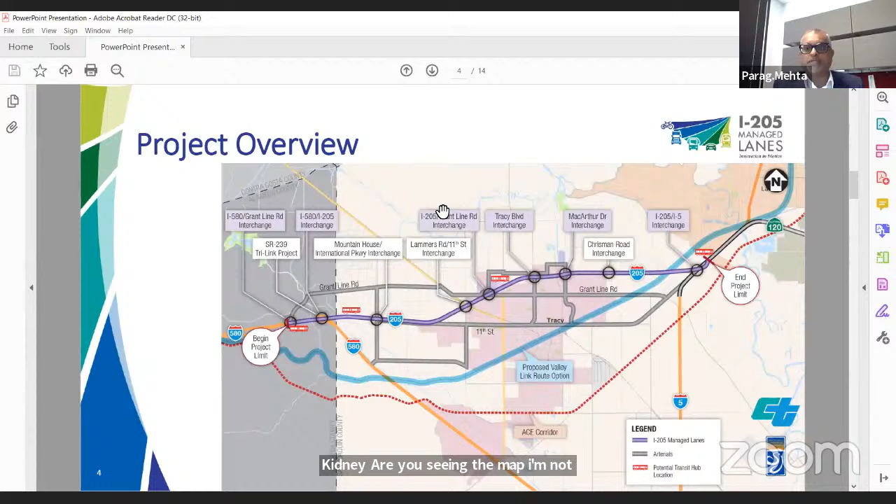Are you seeing the map? I'm not sure if my slides are moving. Right, we're on the project overview now. Okay, all right, sorry, so I was just kind of going through it, where we are and where we're going.

So just to give you an overview, some of you may have seen this before, know the project limits. What I wanted to highlight is our limits are in Alameda County, just west of the 580-205 system interchange, and it runs through 205 through the city of Tracy, just ending east of I-5. So the entire 205 section through the city of Tracy is part of our project.

We understand that there are a number of efforts ongoing in this area: the 239 Tri-Link project with CCTA, the city of Tracy doing Mountain House, Lammers, and Chrisman Road interchange projects, the ACE alignment, and the current CEQA Valley Link alignment. There are a number of parcels being developed. So part of our 205 corridor project in environmental clearance is coordinating with all these projects, making sure the project impacts are coordinated, and understanding how to incorporate those into the 205 managed lane project. Part of our project, we'll be looking at the Grant Line Road interchange in Alameda County, the 580-205 interchange, three interchanges in the city of Tracy, and the I-5-205 system interchange.

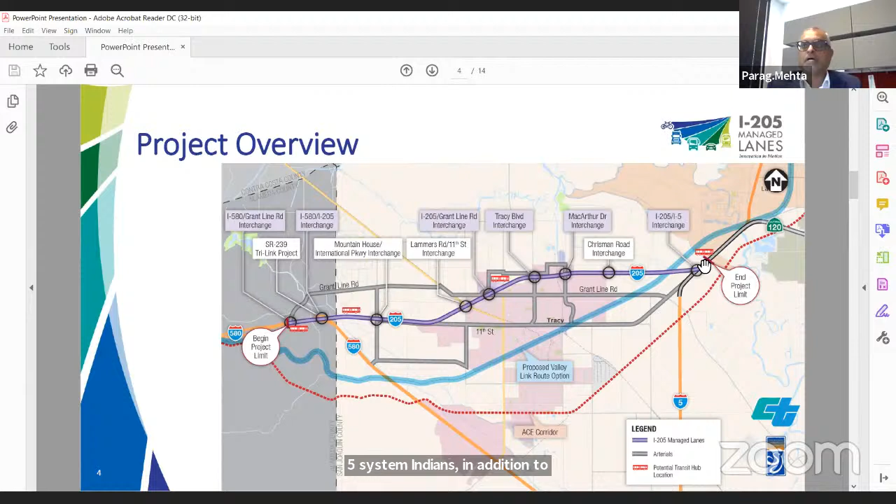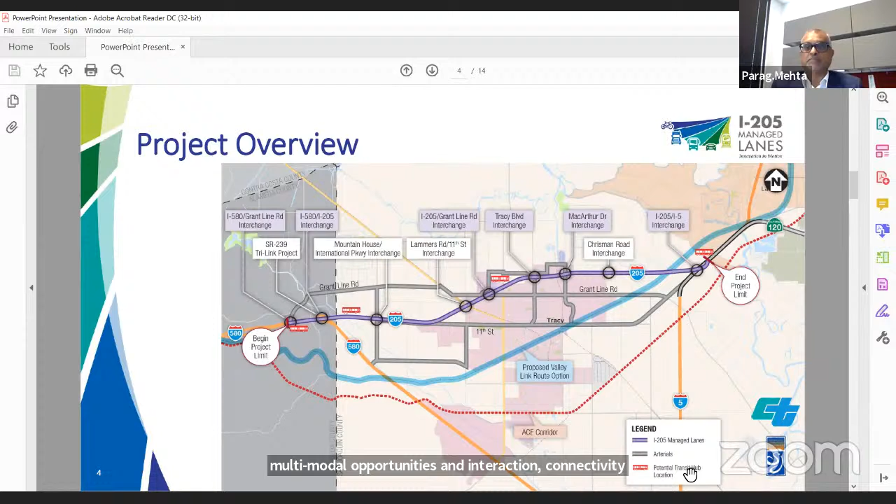In addition to the 205 improvements, we are also looking at potential for transit hubs. These are definitely more enhanced than typical park and ride lots. We're looking at advancing it to provide for multimodal opportunities and connectivity, maybe even EV parking and everything that goes with it, with the project. So that's the overall corridor that you're very familiar with, the area that needs this project.

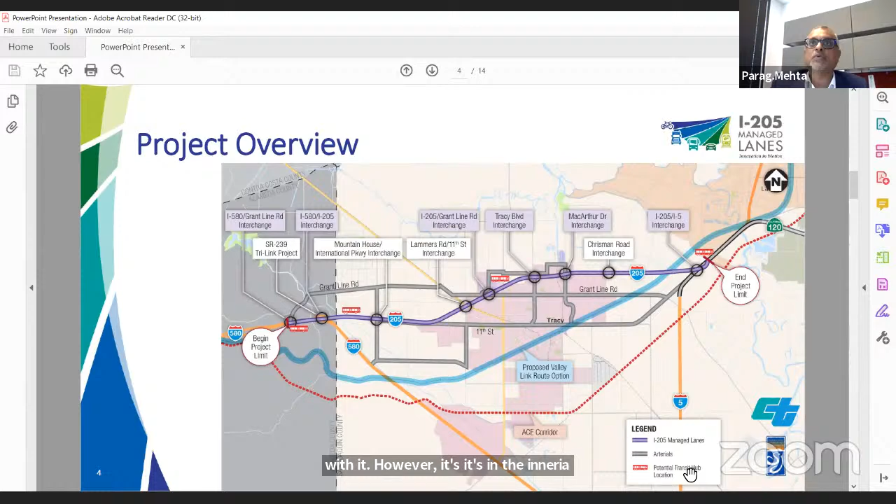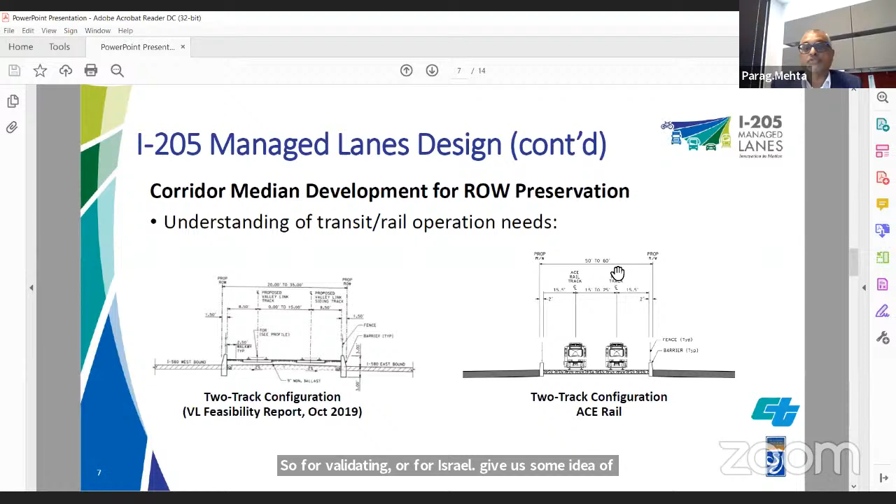What we did is look at understanding the transit and rail operation needs in terms of the typical sections for 2 tracks, say for Valley Link or for ACE Rail. This gives us some idea of the width that would be needed for two-track operations in the median.

We also are looking at a dedicated bus service. Multimodal options is basically our focus - we don't want to preclude any future opportunities. As I mentioned, we are in a very early phase of developing a footprint and doing the environmental clearance, and we want to make sure we are accommodating all different possibilities which can help promote multimodal options in this region. So the idea is to preserve the median of 205 for this mass transit option.

And 205 is a Caltrans right-of-way, so we understand that this will all be subject to Caltrans approval. Again, it's a preliminary engineering planning stage, going through the environmental process. We'll go through iteration, and we're just very early, seeking input from all different stakeholders and operators.

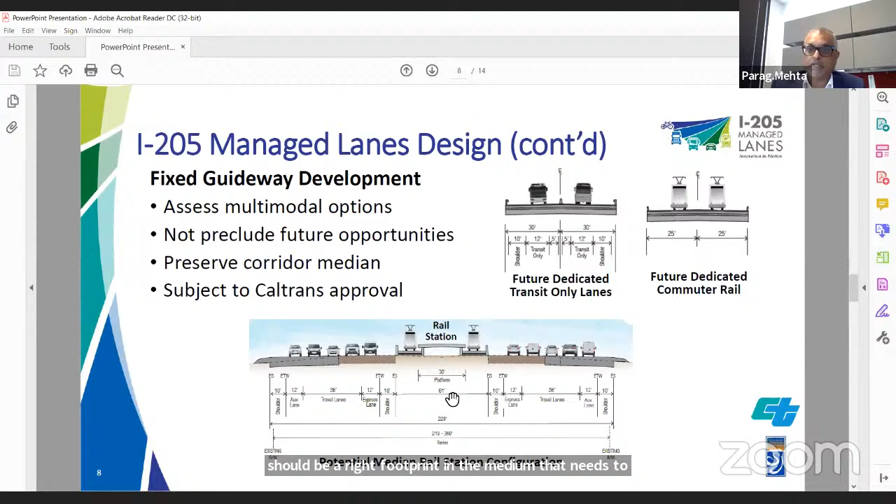One idea we also had was providing the station and trying to figure out, with all different scenarios, what should be a right footprint in the median that needs to be preserved for a future opportunity in the 205 corridor. So with all that iteration and trade-offs, where we are right now is we have 5 alternatives.

This includes a no-build option, which basically means we don't do anything - part of the EIR process, I'm sure you're familiar with that. And we are looking at high occupancy vehicle lanes, express lanes, something that we have shown here with tolling, the express lanes, and transit-only lane.

With all these different scenarios on the highway, we are looking at what can be done on the median and what right-of-way we should be preserving for a mass transit option. We want to share that median for express lanes infrastructure, and at this point we have a 45-foot unobstructed transit corridor width available. We'll need some coordination and understanding of what can come there, what is viable, what should be preserved. So nothing in the future is precluded at this stage, and we're just developing the footprint.

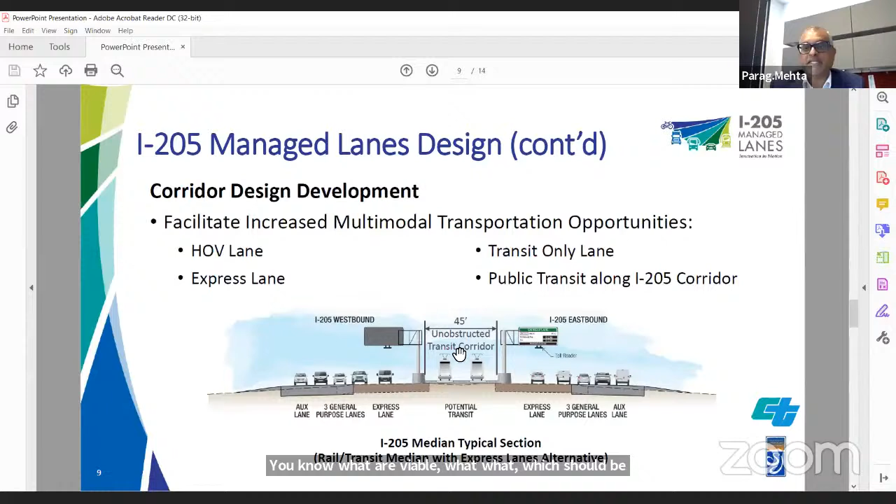Some other considerations that will go into the corridor design are the transit hubs, equally important for the corridor. If we want to promote more multimodal facilities, we need transit hubs that are more inviting and appealing and can promote multimodal use. The three interchanges that are part of our projects in the City of Tracy would be implemented with complete street elements, consistent with the multimodal promotion. The highway operations will need to be looked at with elements of integrated corridor management to improve commuter time, transit time, and goods movement.

So that's the engineering and preliminary engineering side of developing the footprint, working with traffic, working with stakeholders, and developing different improvements.

From the environmental standpoint, which is the phase we are in right now, status-wise we just completed the Notice of Preparation late last year and are working through the general comments received. Overall it was very supportive of the project, with requests for more outreach and traffic analysis, which would be part of our PAED scope. There was also a lot of trend towards a transit-oriented alternative.

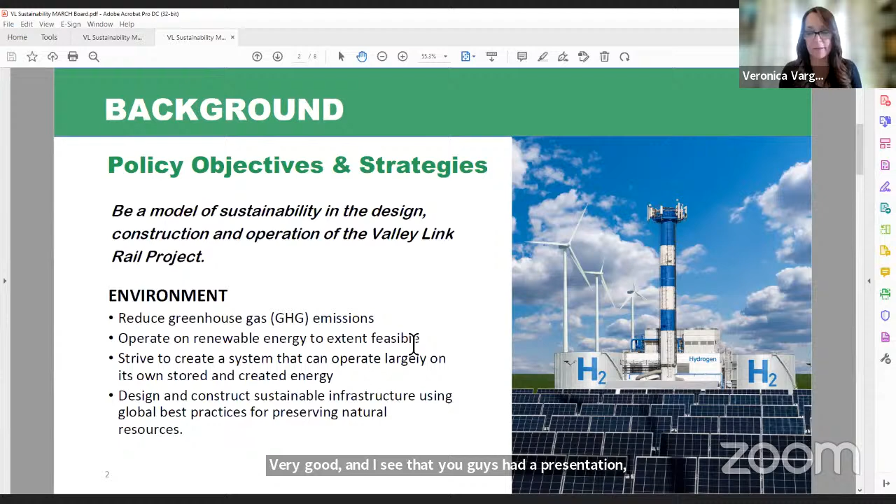Very good. And I see that you guys had a presentation, and I know that Director Hudson and Woerner had a very engaging discussion on this topic. I don't know if you guys want to go over the presentation. I think the proof of concept of this study is wonderful. I know it was a robust discussion during their subcommittee, and you guys are taking this and working hard to just get the preliminary funding. So with that, I don't know if one of you gentlemen would like to take the presentation and go through the slides.

So I don't know, are you asking us to go through the slides, or is there somebody who presented the slides that would like to go through that? Director Woerner, I can do the introductory slides if you'd like, and then with the ad hoc report, if you'd like to give a recap of the key points from the meeting. They're identified in 2 slides. Sure, that would be fine.

Okay, just as background, I always like to start with our key policy objective to be a model of sustainability in the design, construction, and operation of the Valley Link Rail Project. And of course, our strategies identified in our adopted sustainability policy are what we are pursuing in this effort now.

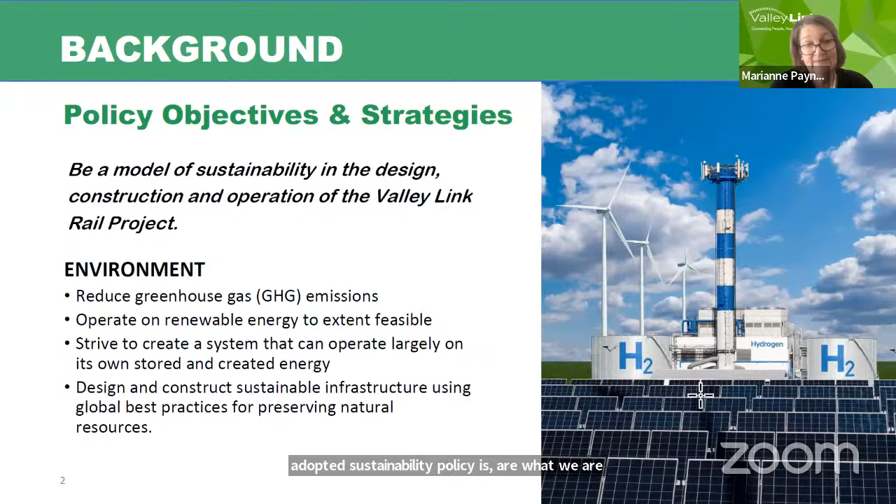Next slide. Just as a reminder, per our adopted 2022 work program, we have been undertaking a series of strategic discussions: in February on vehicle technology, March is our month to examine potential energy strategy and kick off our proof of concept study for a potential hydrogen production plant. Next, in April, we'll actually be back to look at some preliminary findings of the proof of concept for the hydrogen production plant, and also examine some global best practices for sustainable design. March and April, we're looking at a possible town hall meeting. And then in May, we'll be asking the board to consider some recommendations on some of these topics we've been reviewing.

Next slide, Candace. So for today's agenda, we'll start with a report and then a discussion that will be led by Brendan Schaffer from Zen, our project team. And then after our discussion, we'll look at next steps. So next slide.

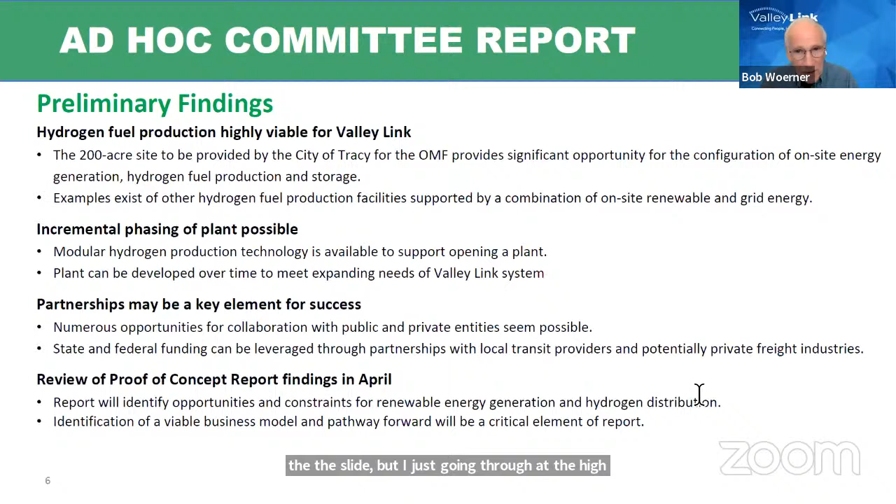Sure, I think everybody can read the slide, but going through it at a high level, the exciting thing is that the site is available to produce the energy needed to run the trains. The question is what fraction of the energy needed to run the trains can be produced on site. What more might we have to get, or on the flip side, is there excess production that could actually be sold and utilized by others?

So that's part of sizing the site versus the production technology, and then you think about all the different efficiencies in the technology. You have to do a lot of technical analysis to decide what fraction of the total energy needs the site itself can produce, and at what cost, and does it make sense. But in principle, what we're looking at is something that would be really nicely zero emissions, with all the energy needed to run this system produced on site. That's to be calculated and thought through, and then you can look at other examples around to see whether the calculations make sense.

The next bullet is that you could do this in phases. You don't have to do it all at once. And as was also pointed out, partnerships are necessary. There are other entities producing energy in the vicinity, and to what extent can we partner with them? And then, of course, what funding can you get based on the kind of concepts that we have?

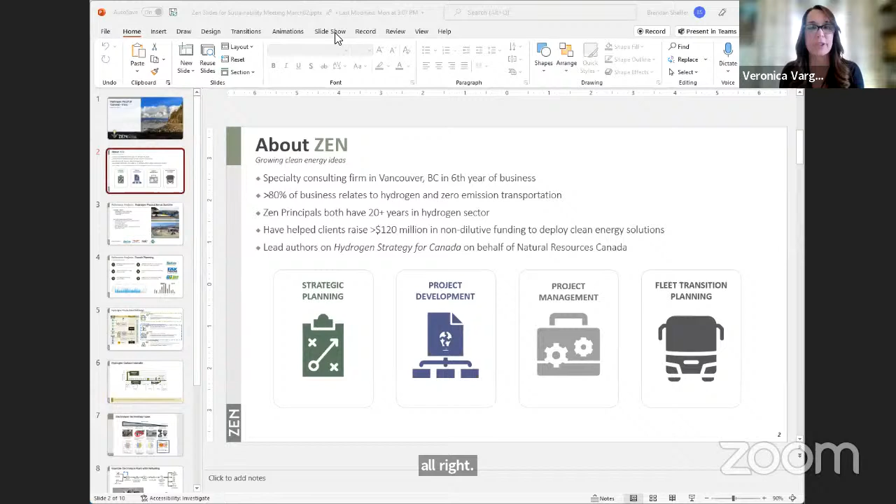Just a quick summary about who Zen Clean Energy Solutions is. We're a specialty consulting firm in our 6th year of business. It was started by Sabina Russell and Jeff Grant, who were longtime employees at Ballard Power Systems, one of the major proton exchange membrane fuel cell manufacturers in the world. They started this consulting firm to look at other factors outside just the fuel cell stack itself.

There's a lot of infrastructure upstream to produce the hydrogen that goes into the fuel cell stack, so they started this consulting firm to work on those other aspects. One of the big things the firm has accomplished is developing the hydrogen strategy for Canada. There are four areas Zen focuses on: strategic planning, project development, carrying that through to project management, and fleet transition planning. Historically this has been a lot with public transit fleets, but it's been expanding into other heavy duty fleets as regulation in California has started to target those fleets.

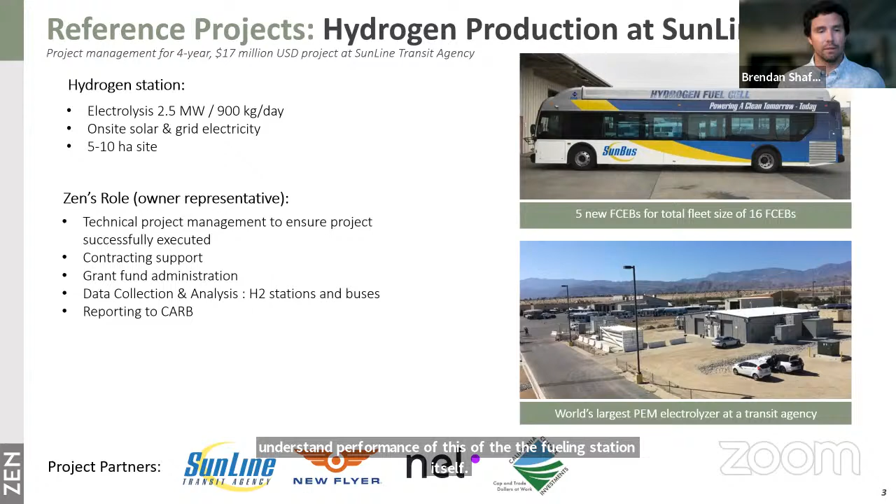The other reference projects we wanted to point out were the transit planning we've done with various transit agencies across the state. With the ICT regulation, the Innovative Clean Transit Regulation, all transit agencies in the state needed to prepare a transition plan to zero emission buses. We participated with several different transit agencies across the state in developing their transition plans.

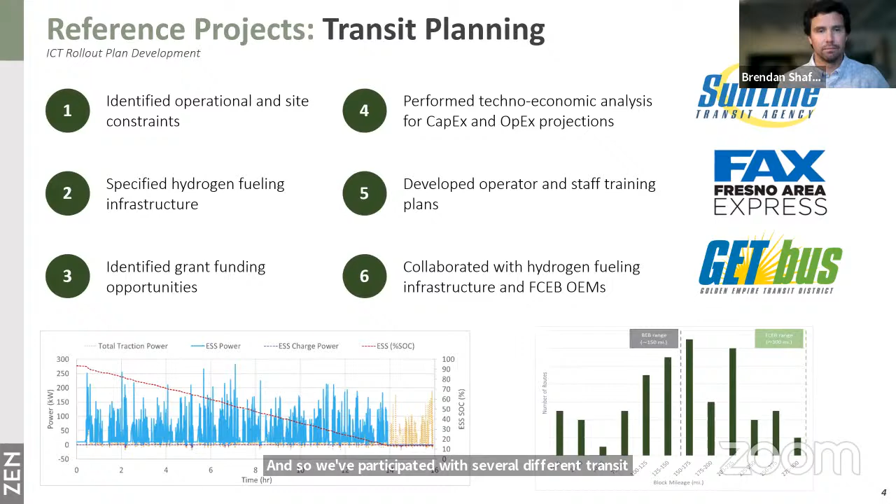Moving on to the topic at hand, which is how we're going to go about working on this proof of concept for this hydrogen production facility. The first thing we thought we would walk through is the different hydrogen production pathways.

I won't spend too much time on this, but the general idea is for this project we're going to focus on green hydrogen, which is electrolytic hydrogen. That means it's coming from an electrolysis process where you're putting in electricity and water to produce hydrogen and oxygen, and this electricity will be renewable electricity, thereby making it green.

As board member Woerner was mentioning, there's quite a bit of land available at the Tracy OMF site, and there's a lot of opportunity for generating a lot of that renewable electricity right there on site.

The other term I want to point out is blue hydrogen, which comes from natural gas with carbon capture on the back end. We're not considering that for this proof of concept, although there might be opportunities with biomass in the vicinity, and there's also the opportunity of wind. All of the hydrogen produced would be very low carbon, if not zero carbon intensity hydrogen.

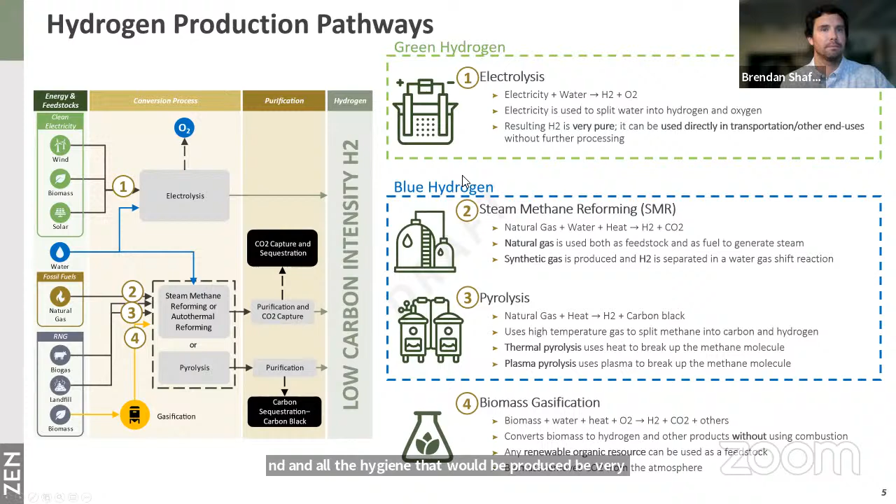So just to quickly run through the different pathways: if the electrolysis is driven primarily from the grid, you're going to have a fairly high carbon intensity. Obviously as the grid gets cleaner, that's going to decrease. But the goal here is really to use on-site electricity and power it 100% with renewable electricity, so you would be basically at zero - not basically, you would be.

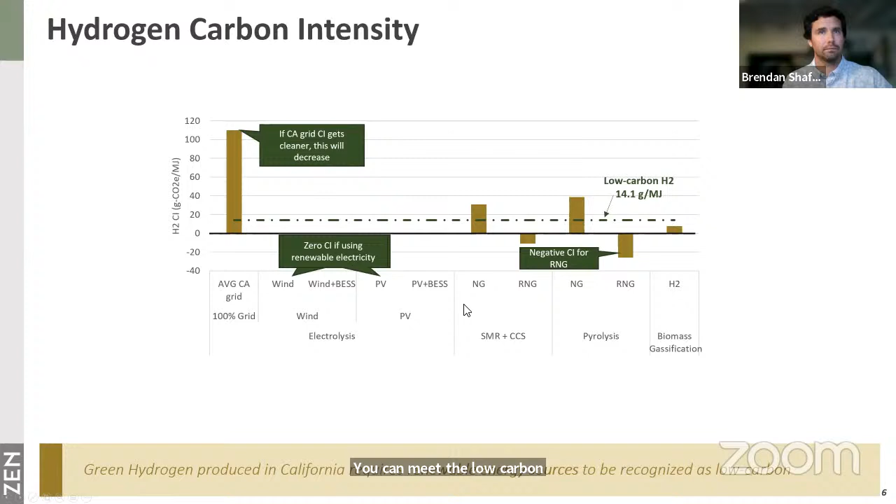This slide just quickly reviews the different electrolysis technologies. It organizes them based on their bankability or commercialized level. So alkaline is a very commercialized electrolysis solution. The issue is that it really needs to be done at industrial scale - it's not very modular, and it needs to operate at steady state for the most part.

Proton exchange membrane is more modular and can have better on-off performance, so it would fit better with a variable renewable energy electricity input, such as wind or solar. This would be the technology we're looking at for this project. There are a couple other more advanced technologies in the works, and solid oxide electrolysis is the technology that Bloom Energy is working on.

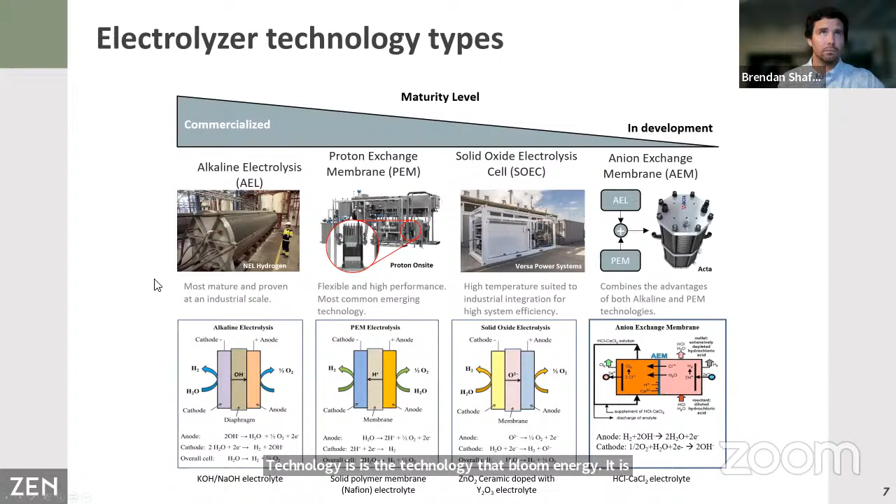On this slide, we're showing the supply chain for green hydrogen. You start with renewable electricity, either from solar or wind. Put the water in, get some hydrogen out. It's going to need to be compressed, and it could also be liquefied depending on your distribution - how you're going to distribute it. You're probably going to have some storage, and then you need to get it to wherever you're going to dispense it into the different vehicles.

On the bottom of the slide, we're showing some layout of equipment, just to give a sense of what it looks like - this would be for a containerized solution. Inside this container would be the electrolyzer, and inside this container would be balance of plant and compression. Then there's some high pressure ground storage, as well as trailers that could be pulled in here. These are some examples from proton exchange membrane electrolyzer manufacturers.

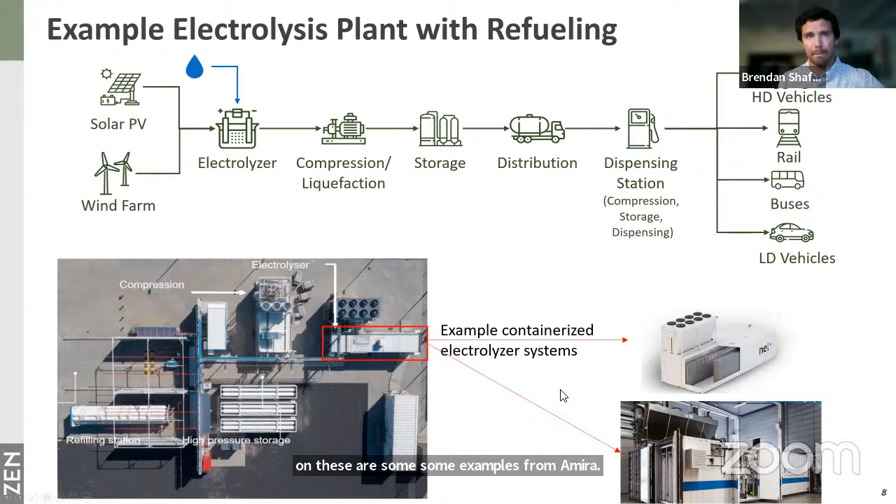And then we thought it'd also be helpful to show what Sunline's system looks like. Sunline's electrolyzer is a NEL proton exchange membrane system, 2.5 megawatts, 900 kilograms per day.

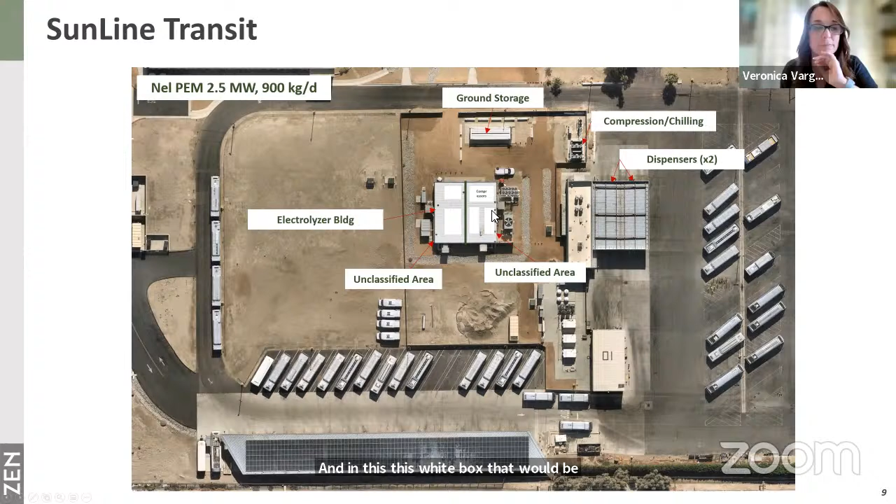It's a building solution, a little different than the containerized solution shown on the previous slide. In this white box here is where the electrolyzer is. There's some gas management over here, and some compressors here. Those compressors boost the pressure of the hydrogen coming out of the electrolyzer, and that goes into the ground storage. Then there's additional compression and chilling that feed to the dispensers.

These are the bus fueling lanes here. And then there's two areas in the building. Hydrogen is on this side, so it's classified—that should read classified. And this is an unclassified area, where the rectifiers are, to take the AC electricity and rectify it into DC, which drives the electrolyzer. There's some additional equipment in the unclassified area.

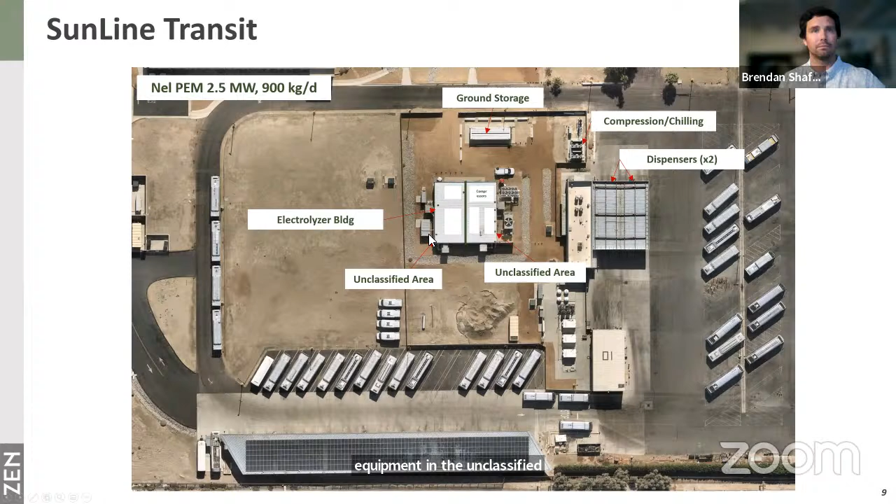And then finally, we put together some quick sensitivity analyses on what the production cost for hydrogen might look like. On the y-axis, we have dollars per kilogram of hydrogen. A kilogram of hydrogen is roughly, nearly equivalent to a gallon of gasoline, just for your understanding. On the x-axis here, we have utilization—how much you're utilizing that electrolyzer asset.

So if you're only putting electricity into it 40% of the time, that would be 40% utilization. What we've overlaid here are different areas of expected utilization depending on the renewable electricity you're using. Photovoltaic solar would be somewhere around the 20 to 30 range. Wind would be anywhere 30 to 40. I think these kind of got shifted a little bit, but you're going to need some battery energy storage if you want to go to a very high utilization.

And then we also have the electricity price effect over here. So this would be for 12 cents per kilowatt hour electricity in, and this would be 2 cents. Each of these lines represents a different capital cost for the electrolyzer system—$100, $200, $500, $700, $900. Currently the capital costs we're seeing are up in this range, if not more, once you include all the site integration work that needs to happen.

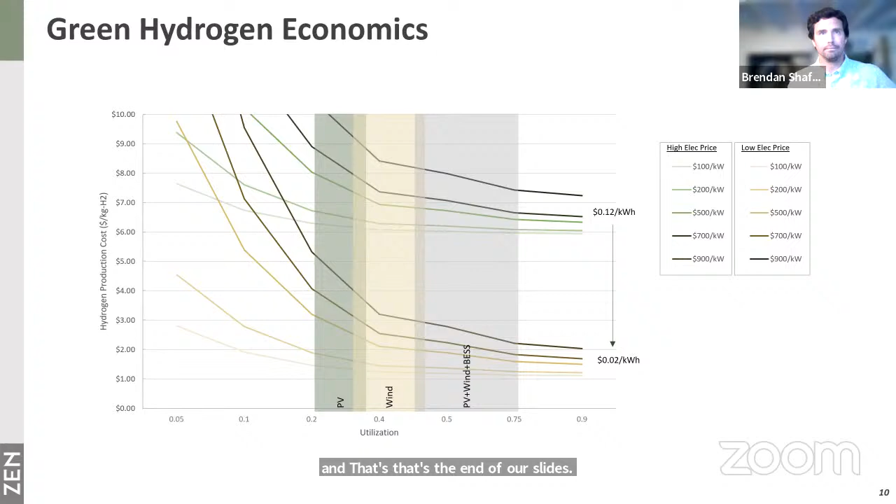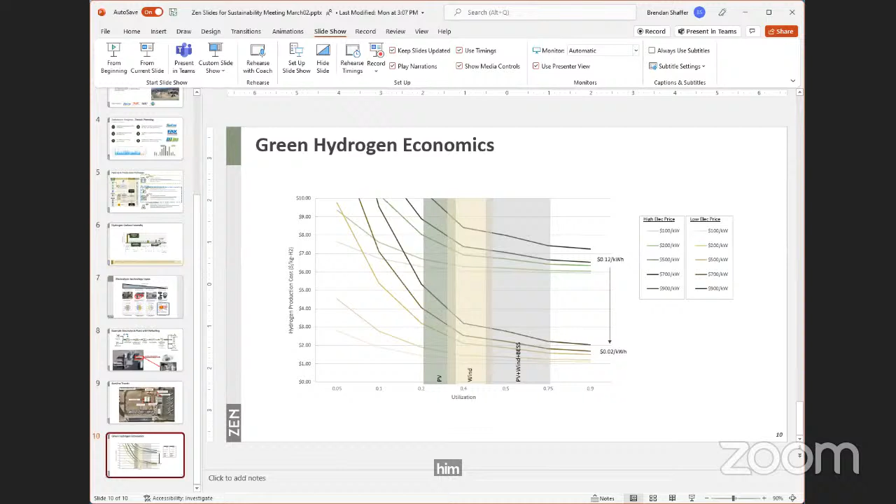You're muted. Aren't you muted? I was trying to be respectful.

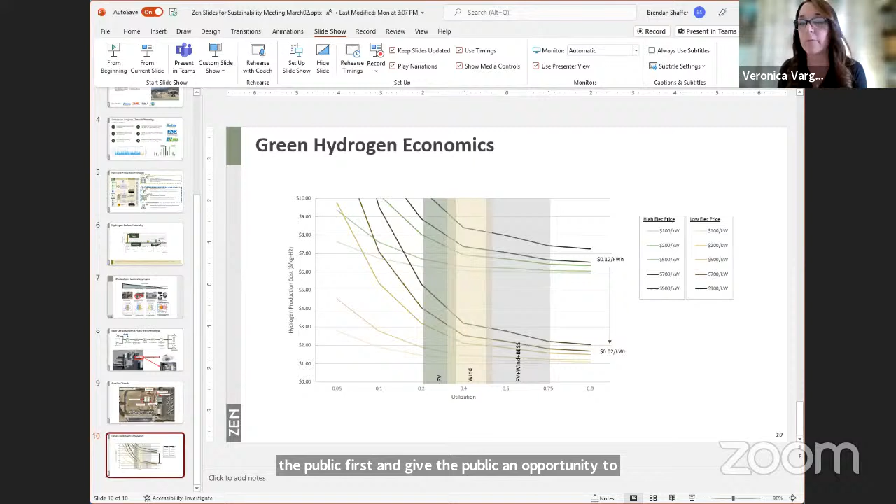I'm assuming you can hear me. My question is really directed toward Director Halpert. Will the ACTC Hydrogen Summit or whatever be well noticed to the public and available to the public? Yes. Thank you.

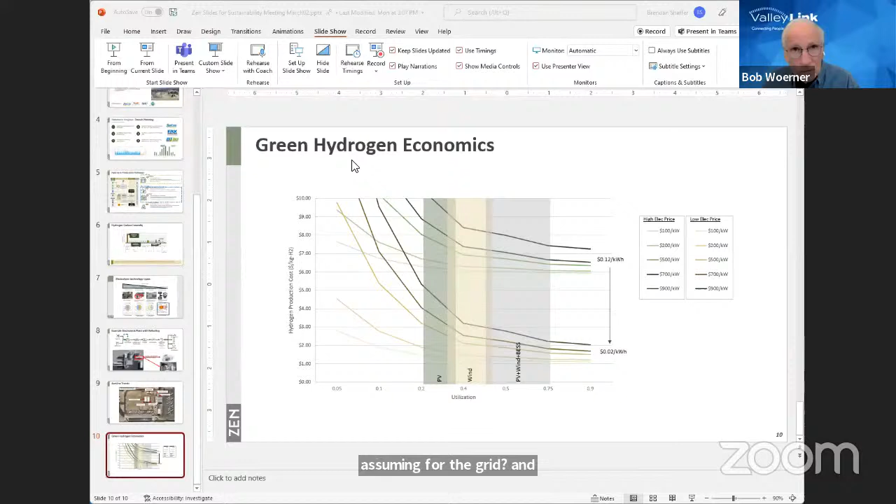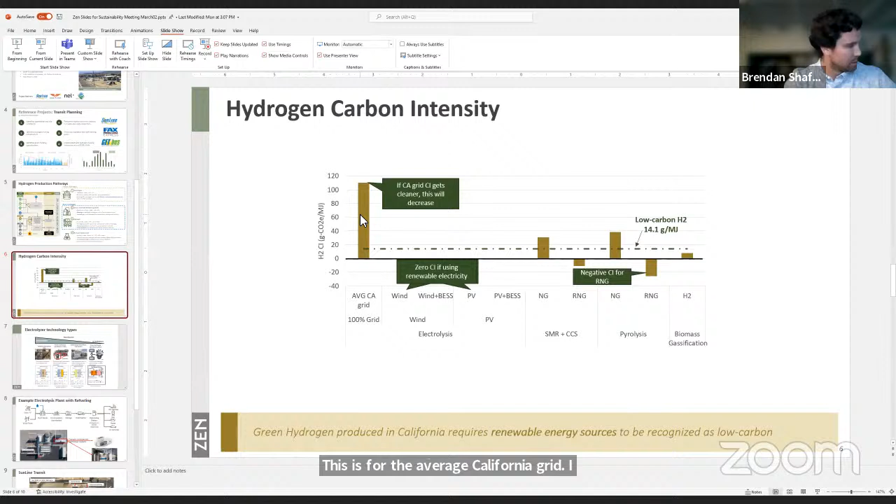So, you should go back to it, it's a few slides back. That one, yeah, this one here. So this is what we're using. You're right, this is for the average California grid. I think it's based on the Air Resources Board calculation for the California grid.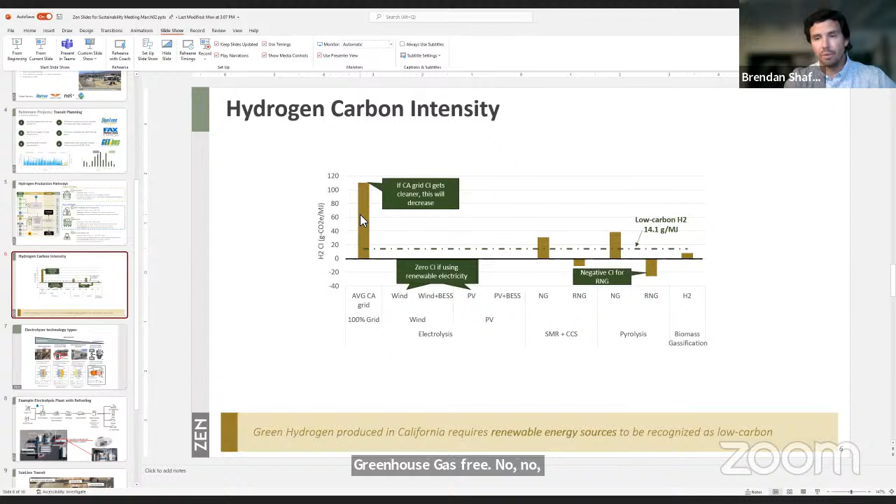Oh yeah, so you don't have to. I just want to say, check that, because I think the PG&E grid's 84% greenhouse gas free. No, yeah, you're right, the PG&E might be cleaner. It's way cleaner. So anyway, from the greenhouse point of view, yeah. And then the other one, if you go two slides down.

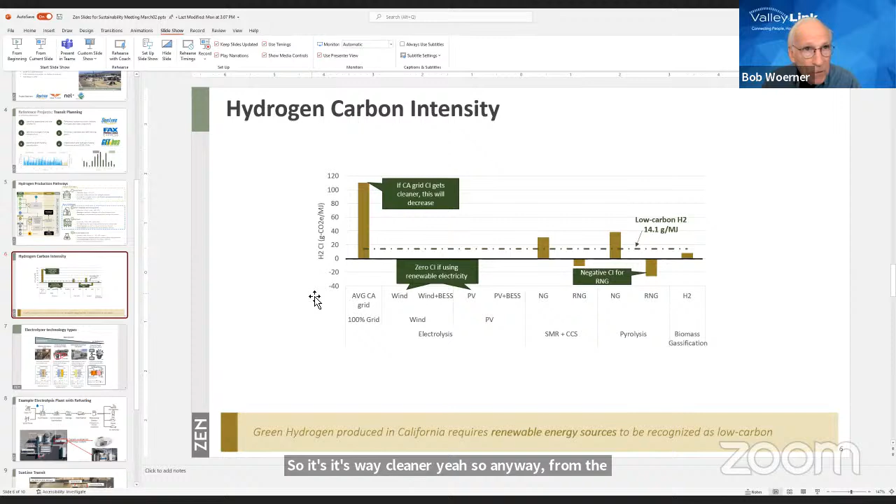The electrolyzers come out at 30 bar, and you need to get up to 500 bar to cascade fill into the rail vehicle, which I think is at 350 bar. So you're going to need to compress, but you're not going to need to liquefy and keep it. No, you don't need to liquefy.

That is why it's so helpful to have a scientist within the group. So with that said, I want to pass it to any other members of the board that may have questions or comments.

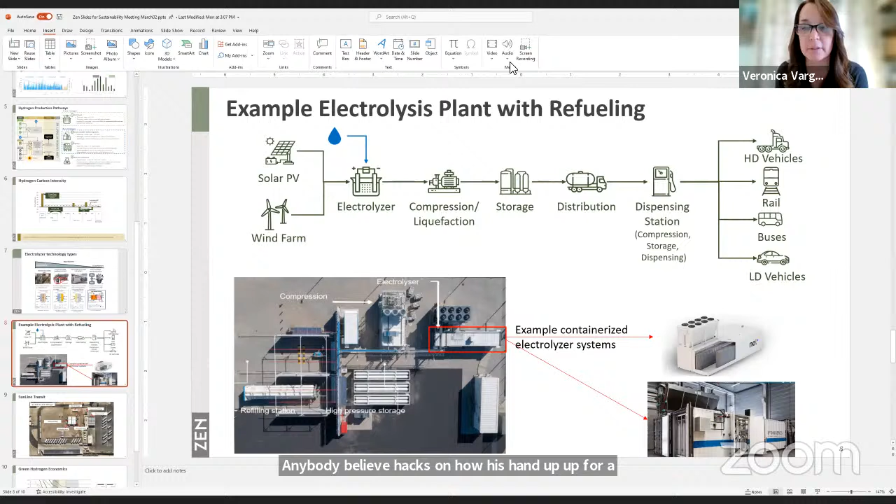Anybody? I believe Hudson had his hand up for a moment. I want to call... All right, with that said, we'll move on then to Harbor. Director Harbor, you have the floor.

I guess just to make sure we continue the analysis and dialogue, and maybe you're about to talk about next steps, but to Mayor Woerner's comments, we're not going to do something that doesn't make sense to us. We'll dig in, roll up our sleeves, rely on the people we rely upon as governance leaders. We ask the questions, understand the outcomes, and hold the system accountable, but we rely on professional staff to do the real detailed work. As you can see, we have scientists on the elected body as well. But if you could review the next steps, when will we lay money down and things like that, because indeed these are large capital expenditures.

And then if Zen could comment, I've made the comment before that we ought not invest in something we're the only investors in. If everyone else is investing in something else, then we would know that. That's one of the main reasons for my desire to have an industry-wide summit, bringing industry, agency, and electeds together to talk about all the different options and variables and understand what everyone is doing. So if we could comment on the fact that we will likely not be alone in making these decisions—as much as we'll analyze them to death ourselves, we're also going to validate in the marketplace that we're likely not the only ones investing in this space. Just a couple questions around that, and where we're headed time-wise up until the point we lay money down. If staff could comment on that, it would be appreciated.